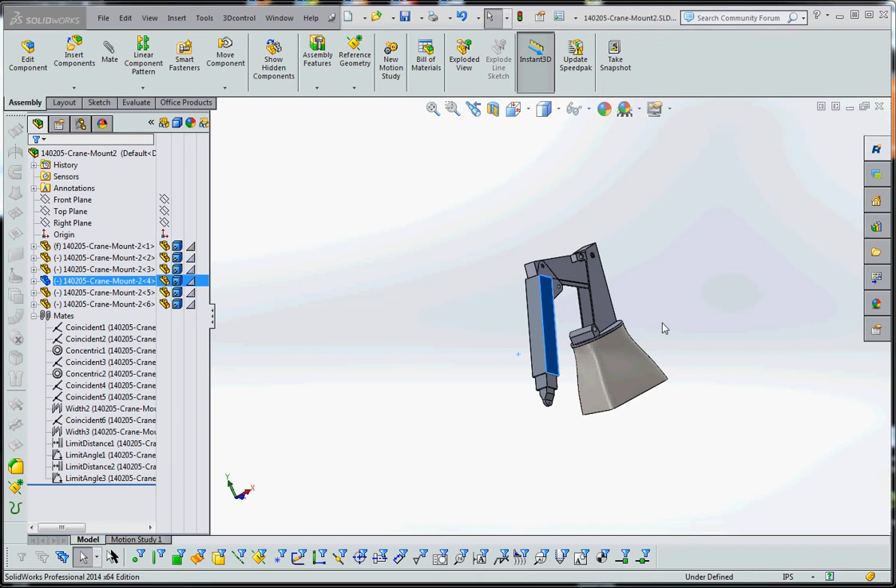This is our sixth video in our series on using solid body parts in assembly design, and we'd like to conclude this. What we have here is our assembly. Our assembly is all done and almost ready to go, but we need to make some modifications for demonstration purposes. We need to make modifications here to show you how easy it is to use the design sketches we have in this part in order to drive this whole design here.

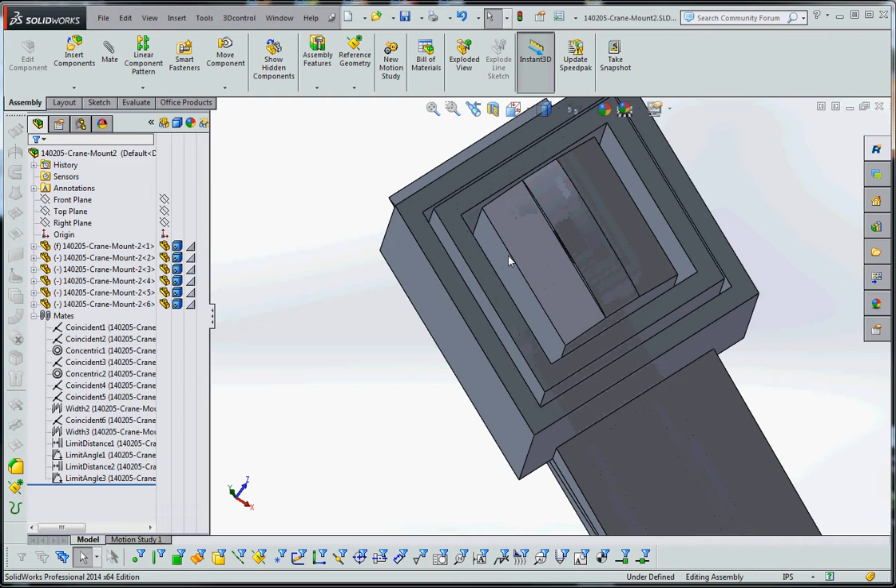So we have a couple things that are wrong. First of all, the end of the boom. There's a little bit of inconsistency: the distance between boom 1 and 2 is much wider than it is between 2 and 3. I think it should be about 1/4 of an inch, so we're going to make a change to that in our front sketch.

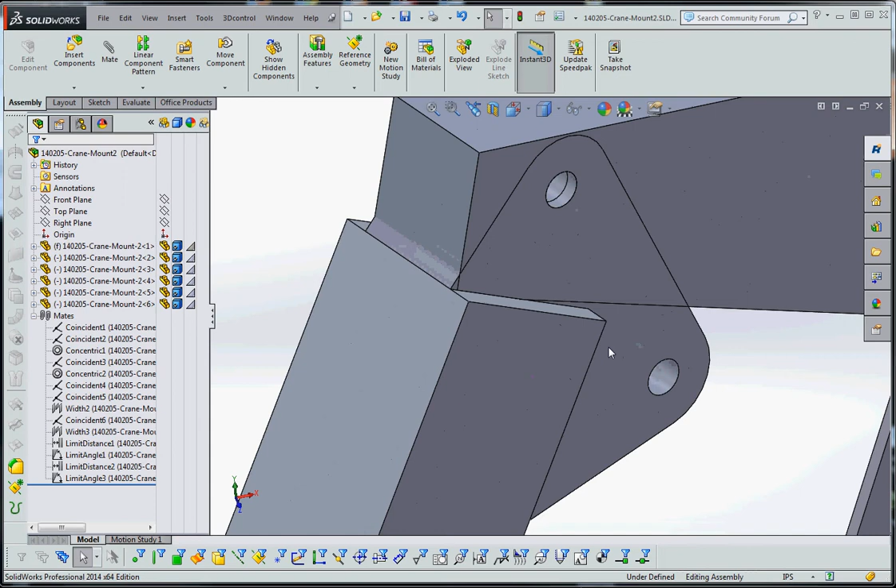We also have an interference issue up here too, with the support for boom 3. It's actually interfering with a horizontal support, so we kind of need to get that fixed. Maybe make that a little bit thinner. We also have a clearance issue up here too, where this top part of the boom is actually interfering with the horizontal piece. What we want to do is move this hole around, maybe using 2 different dimensions for that.

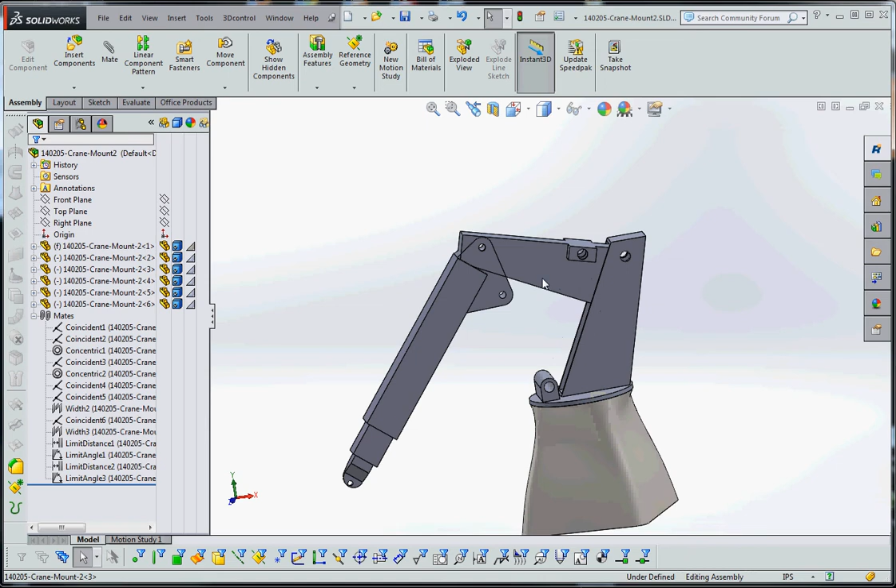Another item up here is this hole up here. It's kind of digging into the top of the piece, kind of hard to manufacture. It's probably something we don't want to have there, so we're going to go ahead and move that out of the way. So let's do this. Let's open up one of our parts, and autosave, nope. We want to get the regular part out here, and we're going to make modifications to this.

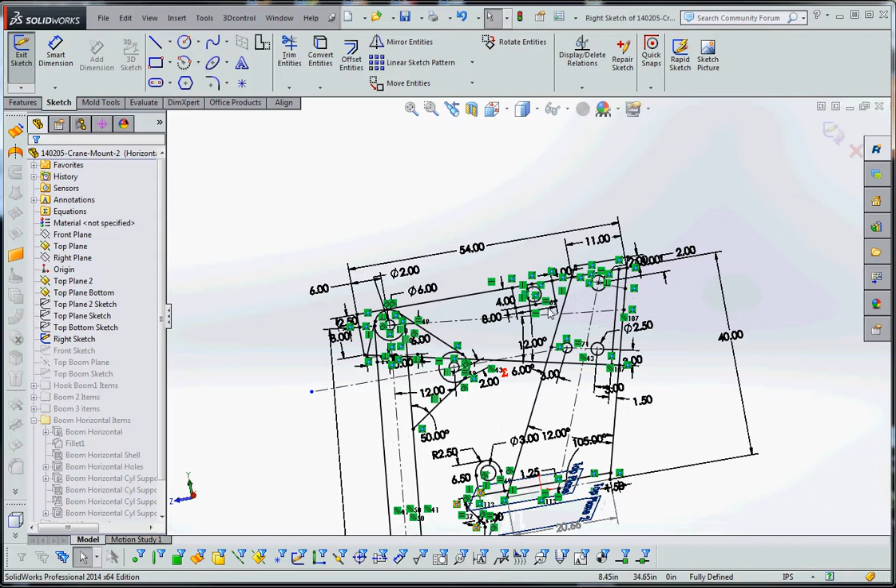So we're not only making modifications to this part within this configuration, but we're actually making modifications to the right sketch which defines all the parts in our assembly so far. So one-stop shopping. We're going to go to the right sketch, right click on that, and make some modifications here. Instead of 4, we're going to make that 6. So that mounting hole for the hydraulic cylinder, between this hole and that hole where the cylinder is going to go, we're going to pull that down a little bit.

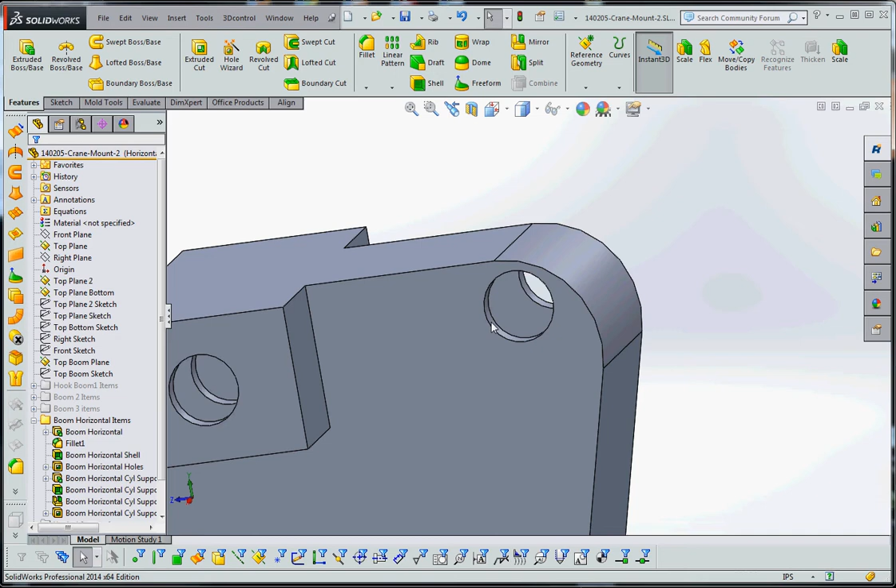This hole up here, let's go ahead and rebuild this and take a look at that, because I don't think that was quite right. I think if we had that hole a little bit more centered in here, that would be good. And one thing to note here too, you notice that we have a fillet in here that's not really reflected in the right sketch, which is okay. What we do is we put that fillet in as a feature.

And when you do something like that, you want to make sure you incorporate that into the right folder. So right down here I have a cut extrude 3, and just for demonstration I have that out here. This is that fillet over here, and what I wanted to do is make sure that that fillet was here before the shell. Otherwise you get this weird geometry where part of the shell is kind of poking through where the fillet is. So we put that in here. I didn't really rename it, but to be consistent, I probably could have renamed it.

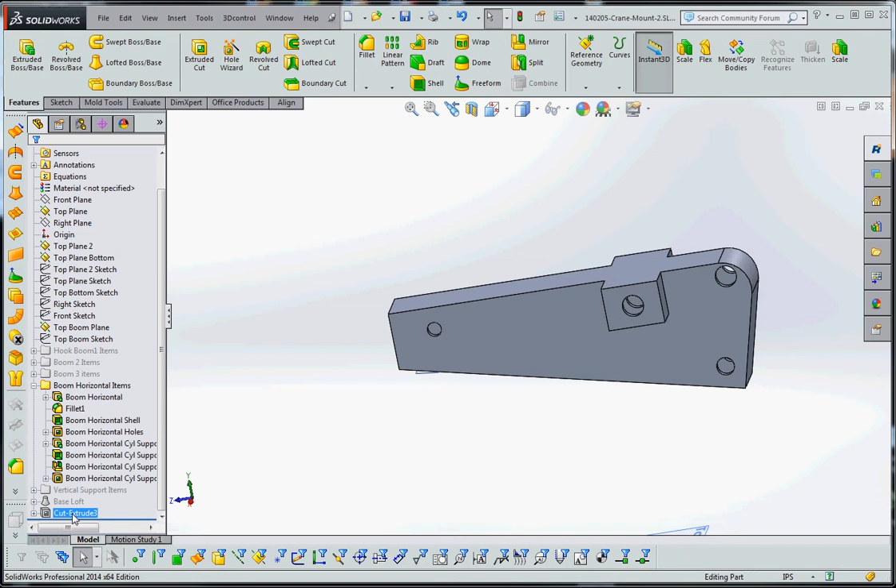But one thing I did down here, just to show you the method, is this cut extrude 3 down here. If I were to unsuppress that, I can also incorporate that into the folder so that it appears only in this configuration of this part. So the way you do that is just expand the folder and stick it in; the bottom would be an appropriate place.

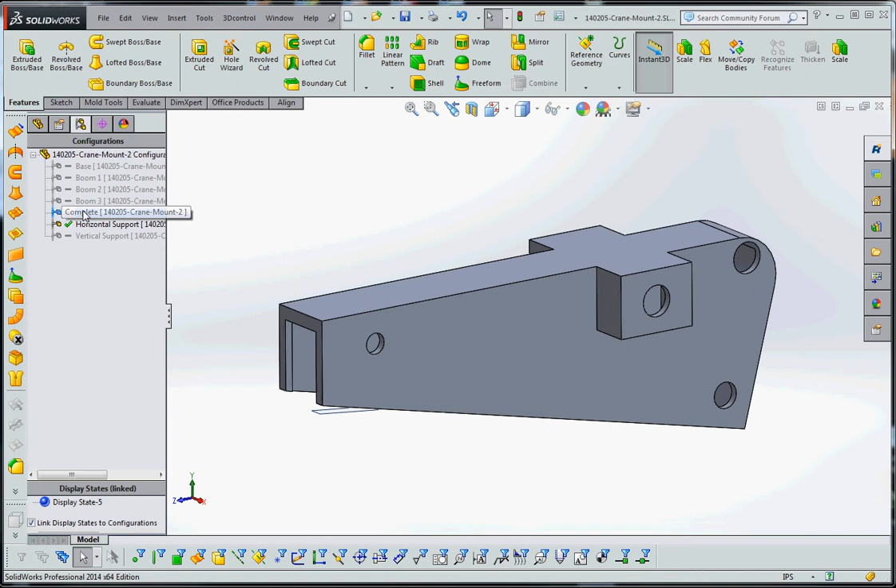And what that does is it provides a cut in here so that when the structure for boom 3 comes into play, there isn't a whole lot of interference. So that's the way you do that. But you want to make sure that when you're making these small model modifications specific to the configuration, that you incorporate that into the folder here too, so it could be suppressed and unsuppressed as needed. So double check that. Let's go to our configuration manager, go to the complete configuration, and make sure those features are still incorporated there. And it looks like they are, so good.

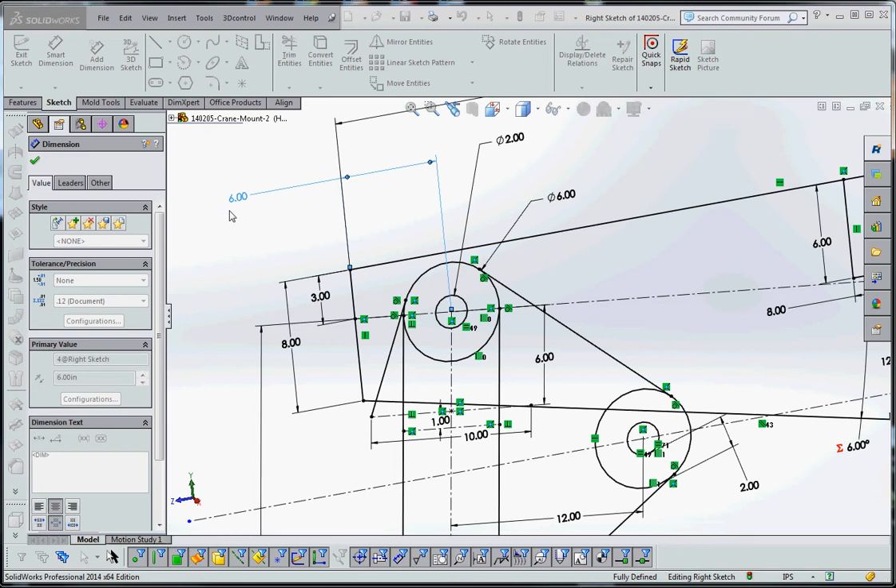I like it. So let's go back to our right sketch, let's go to our horizontal support again, and go to our right sketch and make some additional modifications over here. You notice we noted there was some interference over here with this hole. I think if we made that hole a little bit deeper into the model, and maybe a little bit closer to the edge, we'd probably get rid of a little bit of interference. So that might work out.

We're going to go ahead and rebuild that. And let's go to the front sketch. There's some edits we need to make to the front sketch. So the boom had a little bit too much distance between the two. I think to be consistent, we probably should make that 6 instead of 5. So I'll make that 6.

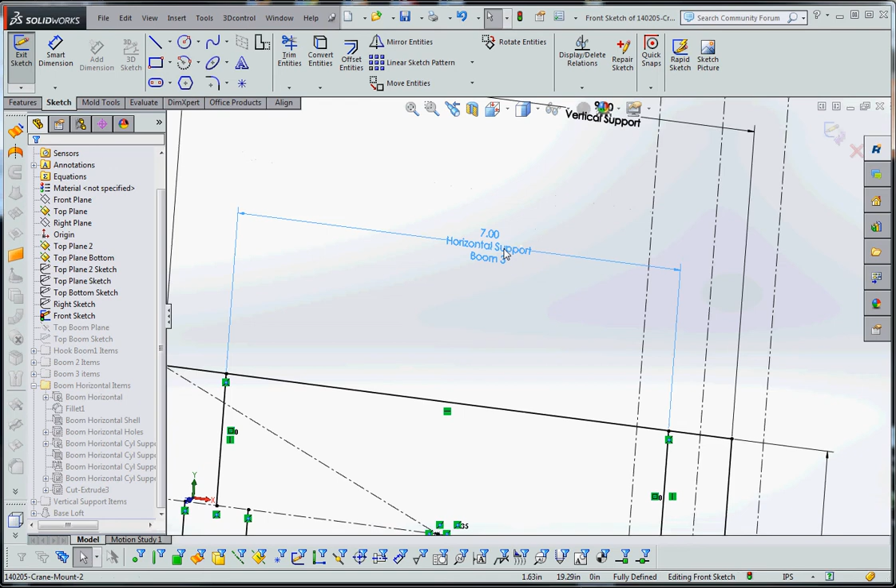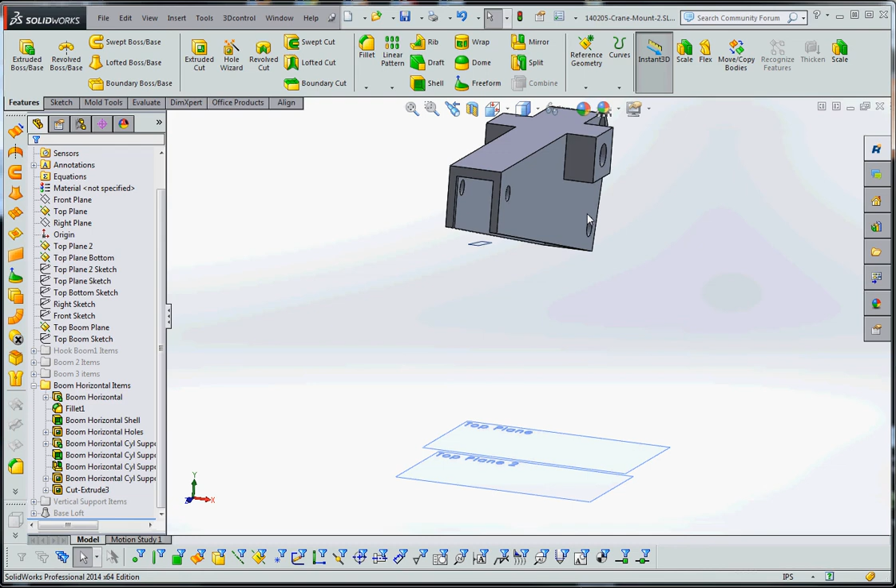Then the horizontal support for boom 3, instead of making that 7, we're going to make that 5. So remember, we used a feature when we did our feature - we used up to vertex in both of these, and we clicked on either one or the other vertex here in order to provide the finishing of that feature. So if we were to go ahead and rebuild that, that model looks like it's in pretty good shape.

This hole isn't in the right location, so again, let's go back to the right sketch and make that modification. I think if we made that 3.5 or 4 inches, I think that would work. Let's rebuild that and take a look, see if that looks good. Perfect, right in the right location.

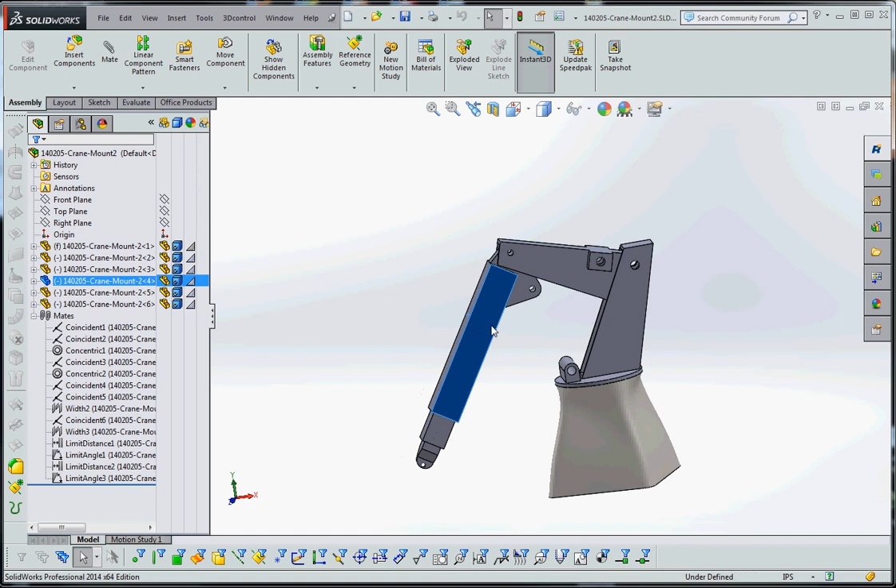Alright, Control Tab takes us back to the assembly model. And yeah, it fixed all that, updated everything, so all the configurations, or parts within parts of this model, have all been updated. It looks like we're in pretty good shape. Again, one of the beauties of doing this solid body modeling using design sketches is that you have the ability to go into the generalized model geometry and the design sketches and make these changes, and it reflects to all the parts, or all the subparts or parts within parts, the configurations of this part within the assembly. It makes all those changes for that.

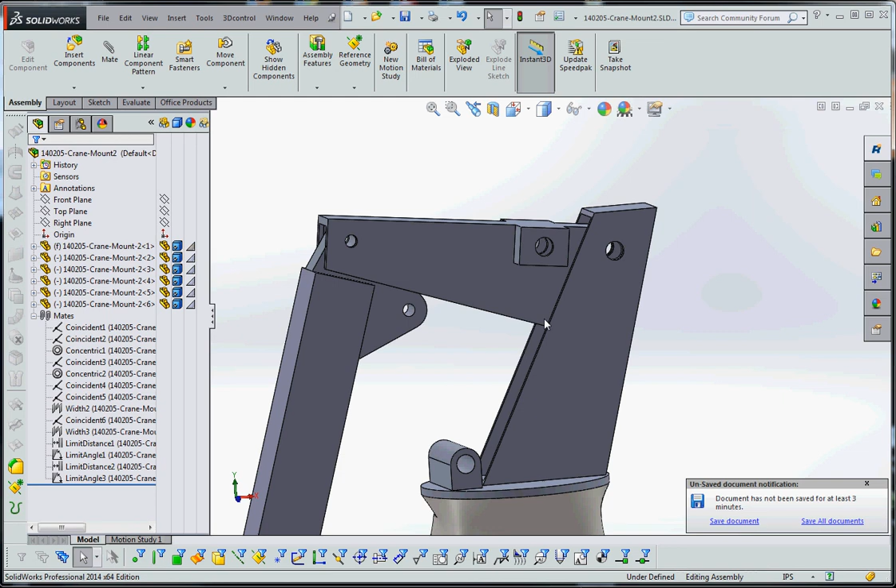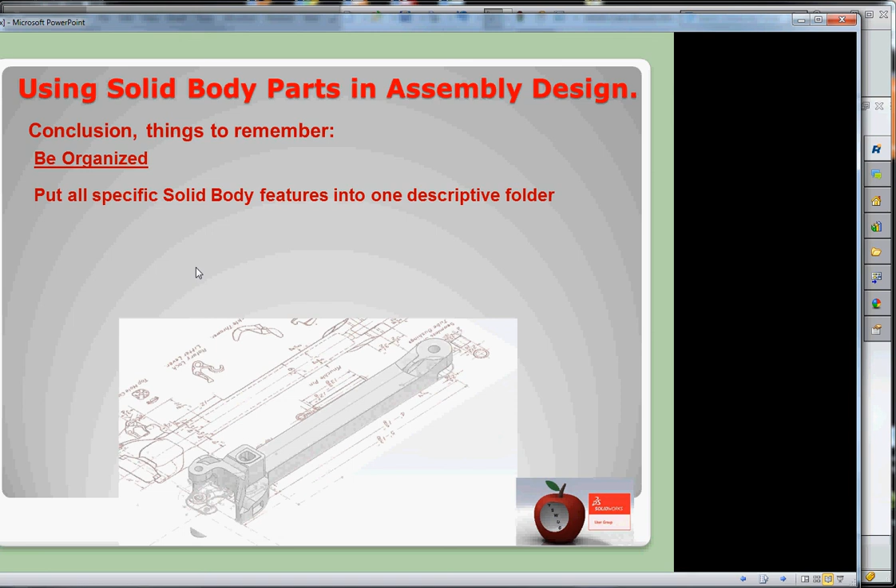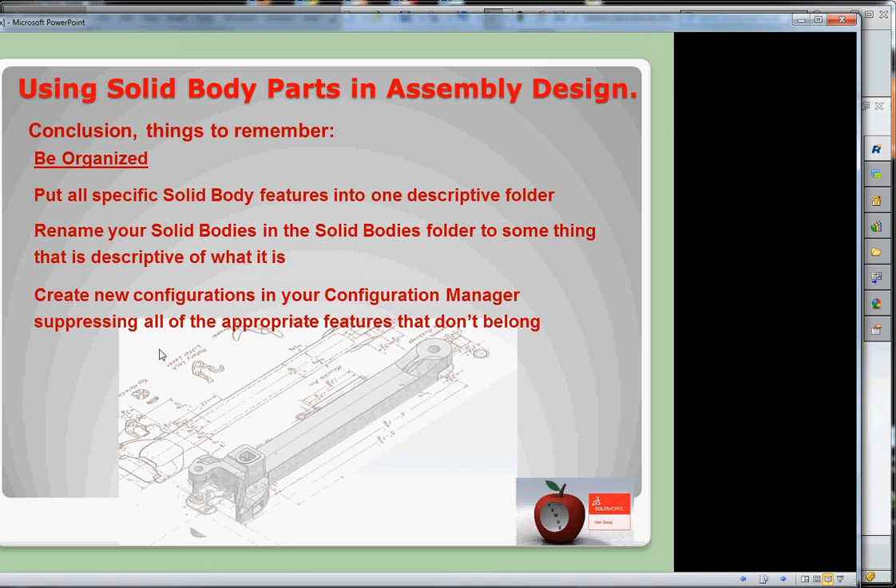So, in conclusion, of course after this you want to create the new assembly, which we did. So things to remember: you got to be organized when you do this. There are 3 elements you need to consider when you're doing all this solid body modeling with the design sketches. You need to have a descriptive folder. You need to rename your solid bodies so you can track it a little bit better to something that is also descriptive. And then create new configurations in your configuration manager, suppressing all the appropriate features that don't belong.

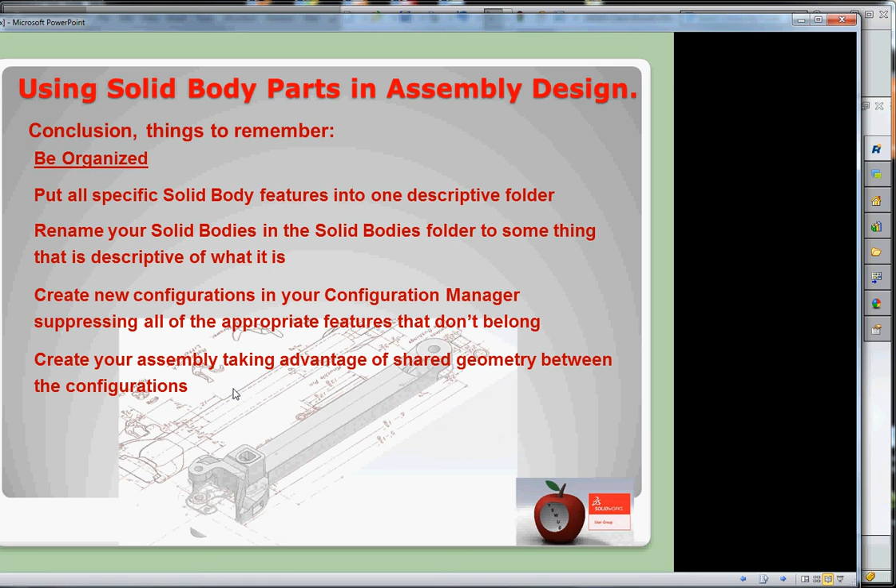So create your assembly taking advantage of shared geometry between the configurations. When you're putting your assembly together, as we did with some of the booms, we mated the right planes of the right planes. What you're doing is you're sharing some of that shared geometry - it's all the same right plane. We're just mating those together, and it makes for a much easier to resolve model when you're talking about the assembly.